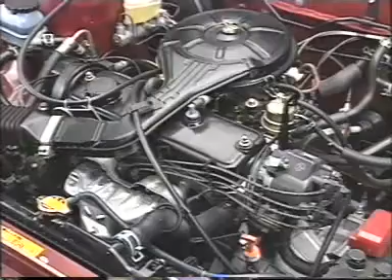Three conditions must be met for a gasoline internal combustion engine to run at maximum efficiency: a good air-fuel mixture, a high level of compression, and an ignition system with optimal timing and powerful sparks. Optimal ignition timing and powerful sparks are the responsibility of the ignition system.

There are various types of ignition systems. In this video, we will mainly use a fully transistorized ignition system to explain the functioning of the ignition system.

In this video, we will look at: first, the structure of the ignition system; second, how a high voltage is generated; third, control of ignition timing; fourth, spark plugs, which use the high voltage to emit sparks, igniting the air-fuel mixture; fifth, other ignition systems; and finally, inspection and adjustment of the ignition system.

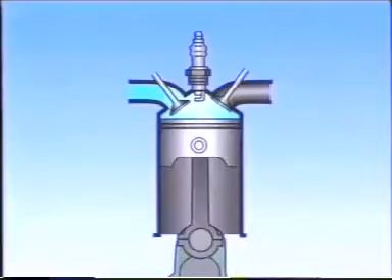In a gasoline engine, spark plugs ignite the compressed air-fuel mixture and generate combustion, providing power. So the ignition system must be able to produce a high voltage in order to provide optimal ignition timing according to the engine's operating conditions.

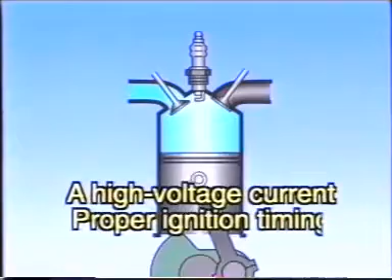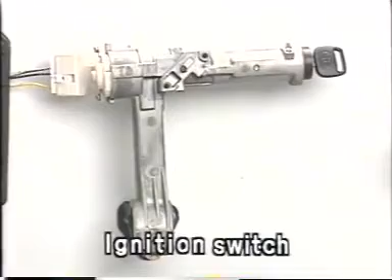First, let's take a look at the components of the ignition system and their function. Electrical power is provided by the 12-volt battery, and the ignition switch. The ignition coil and igniter convert the battery's low voltage into a high voltage.

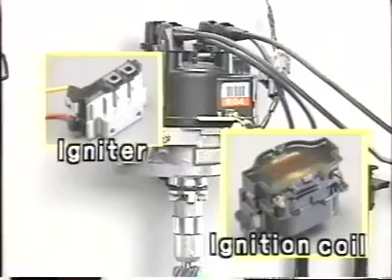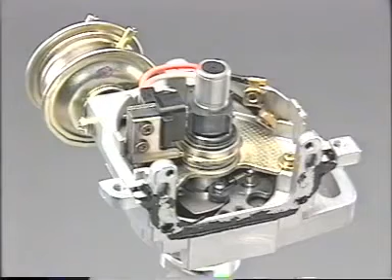This is relayed by the distributor to each cylinder's spark plug. This distributor incorporates an advancer device to obtain optimal ignition timing. A distributor with a built-in ignition coil is called an Integrated Ignition Assembly, IIA.

The charge from the ignition coil creates a spark at the spark plug, igniting the air-fuel mixture. Spark plugs require a high voltage of more than 10,000 volts to generate sparks, but the vehicle's only source of electrical power is a 12-volt battery. So how do we generate a high voltage from a 12-volt power source?

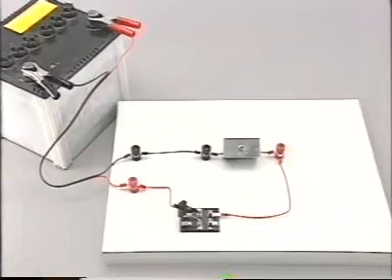Let's explain. Take a look at this experiment. A 100-volt lamp is connected across the battery and the switch is turned on. The voltage is only 12 volts, so the lamp doesn't light.

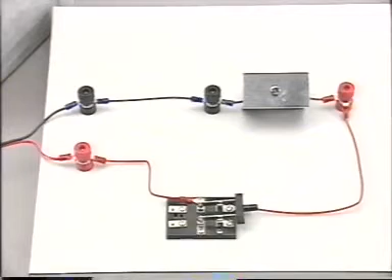Next, a coil is connected across the lamp and the circuit switched on once more. Once again, the lamp fails to light. But at the instant the switch is turned off, the lamp flashes.

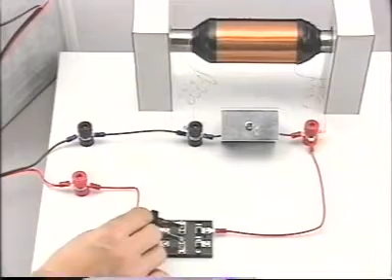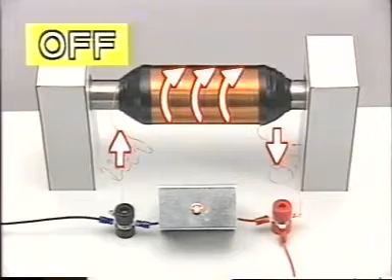Here's why: if the switch is turned off when current is still flowing in the coil, a large electromotive force, EMF, or voltage, is generated, flowing in the opposite direction. This is called the self-induction effect, and the electromotive force generated is called the counter-electromotive force.

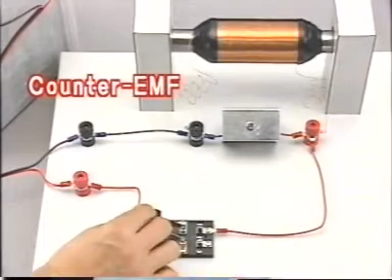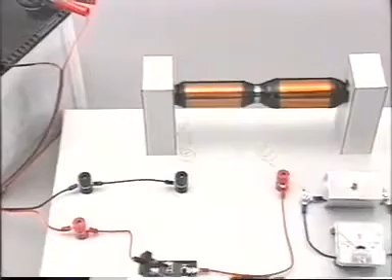Next, let's do another experiment. Two coils with different thicknesses of wire and numbers of windings are connected in series. The moment the switch is turned off, the flow of current in the primary coil is cut, generating a greater voltage in the secondary coil.

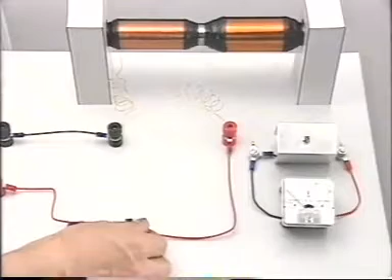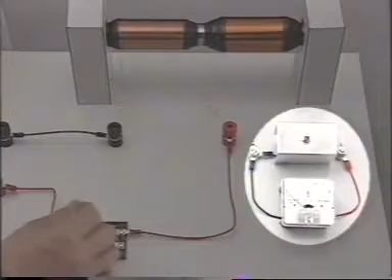When current is switched on and off in the primary coil, a high voltage is generated in the secondary coil. This is called the mutual induction effect. An ignition coil integrates these two coils into one.

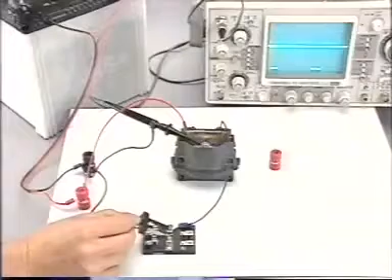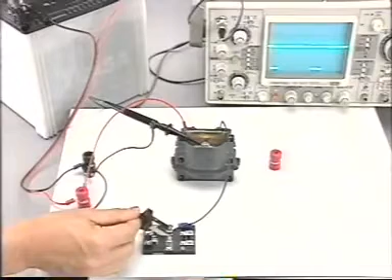Let's conduct a test with an actual ignition coil. The current flowing in the primary coil is turned on and off. As you can see, the ignition coil uses the self-induction and mutual induction effects to generate a high electromotive force of tens of thousands of volts from the 12-volt power source.

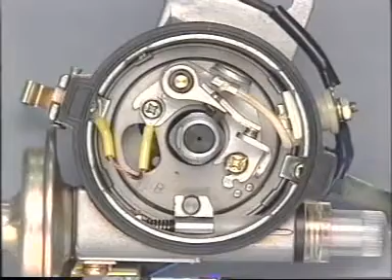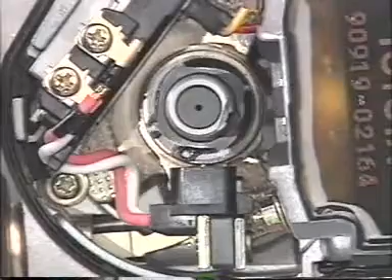Conventional systems use contact breaker points in the distributor to turn the switch on and off mechanically, just like this device. But today, most systems make use of the switching effect of a transistor or an electronic control unit, or ECU.

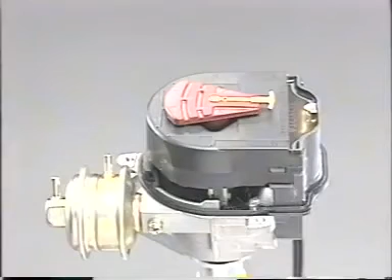Now let's take a close look at how a high voltage is generated using an actual transistorized ignition system. An ignition coil, a signal generator, and an igniter are integrated with the distributor.

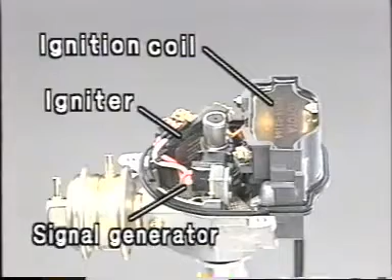In the transistorized ignition system, the ignition signal from the signal generator is transmitted to the transistor in the igniter. This transistor turns the primary current in the ignition coil on and off.

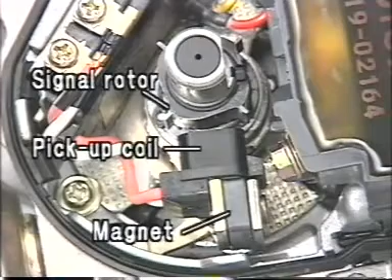The signal generator has three components: a signal rotor, which makes one turn for two revolutions of the crankshaft, a pickup coil, and a permanent magnet. The rotor turns clockwise or counterclockwise depending on the engine.

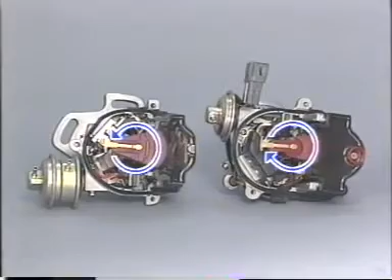As the rotor turns, a voltage is generated in the pickup coil. This is the ignition signal. But why is a voltage generated?

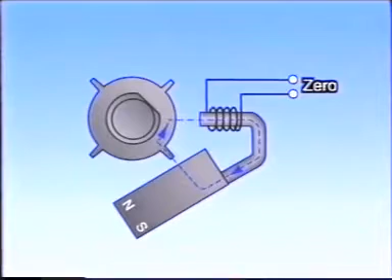The magnetic flux of the permanent magnet flows through the signal rotor, the pickup coil, the bracket, and returns to the magnet. When the rotor is still, there is no change in the magnetic flux. When the signal rotor rotates and a rotor tooth approaches the pickup coil, the magnetic flux density increases. As the rotor tooth moves away from the pickup coil, it decreases.

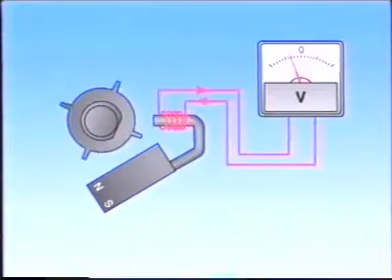This means that the voltage generated in the pickup coil depends on the changes in the magnetic flux. The level of EMF generated depends on the relative positions of the rotor and pickup coil. When a rotor tooth approaches the pickup coil, the EMF increases, and when the rotor tooth and the pickup coil face each other, it becomes zero. When they move apart, a counter EMF is generated.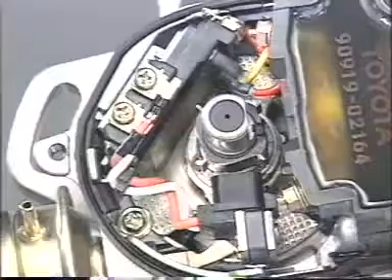These changes in the EMF cause the igniter to switch the primary current on and off. Let's take a look at how the current is turned on and off.

When the signal rotor's tooth is aligned with the pickup coil, the voltage generated in the pickup coil decreases and the transistor is turned off. This cuts off the primary current and generates a high voltage in the secondary coil. The transistor is also turned off when the voltage is generated in the opposite direction in the pickup coil.

In this way, when the engine is running, the transistor is turned on and off every time one of the signal rotor's teeth passes the pickup coil. Every time the transistor is turned off, a high voltage is generated in the secondary coil. The voltage generated in the secondary coil then passes from the distributor's center electrode through the rotor and from the outer electrode to the spark plugs, according to the firing order of each cylinder.

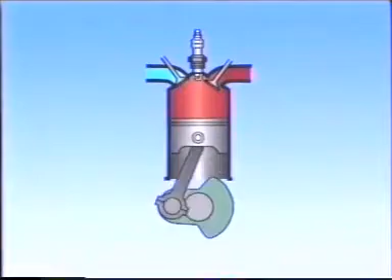Next, let's take a look at the method used to obtain optimal ignition timing. In general, a gasoline engine achieves maximum efficiency if the combustion pressure in the cylinder reaches maximum when the crank angle is about 10 degrees past top dead center. This means that ignition should be timed accordingly.

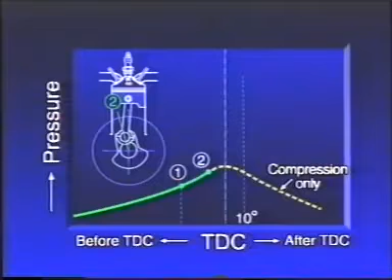This graph shows the process in terms of the pressure changes inside the cylinder. Even if ignition takes place at point 1, combustion doesn't start immediately. Instead, combustion starts at point 2, and pressure starts to increase. The pressure reaches maximum at point 3, and combustion comes to an end at point 4.

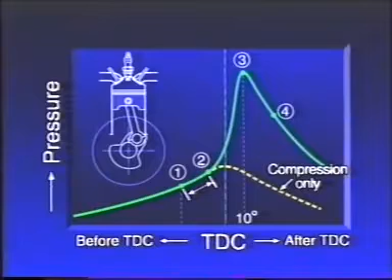The period between 1 and 2 is called the ignition delay time. For a given fuel, this delay is more or less fixed, irrespective of the engine speed. So let's think about what happens if the engine speed increases.

Because the ignition delay time between 1 and 2 is constant, the angle through which the crank rotates in the same period of time increases. The point at which maximum pressure is reached lags behind 10 degrees. So in this case, it is necessary to advance the ignition timing.

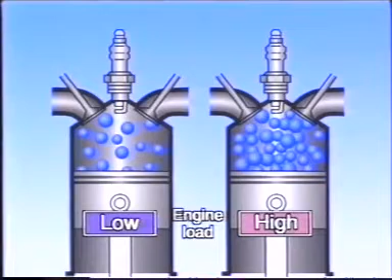If the load on the engine increases, the volume of the air-fuel mixture and the compression pressure inside the cylinder increase. The temperature of the air-fuel mixture goes up, and so the mixture burns faster. As a result, the combustion time gets shorter.

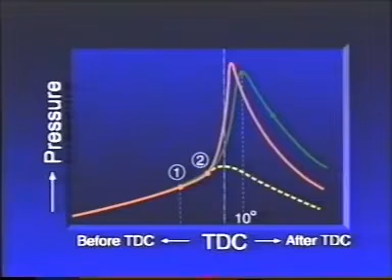This graph shows what happens. In this case, the ignition timing has to be retarded. It is changed according to the engine speed and driving conditions. This is achieved by altering the ignition advance angle, which is controlled by the advancer incorporated in the distributor.

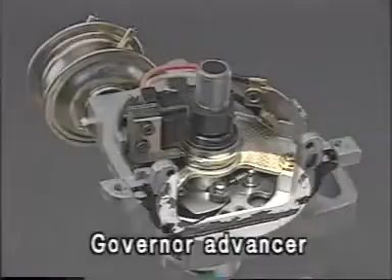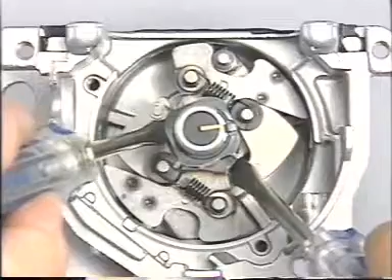Ignition timing is controlled by a governor advancer according to the engine speed, and by a vacuum advancer according to the load on the engine. The governor advancer controls the ignition advance angle by rotating the signal rotor slightly relative to the distributor shaft. And the vacuum advancer controls the advance angle by changing the position of the pickup coil.

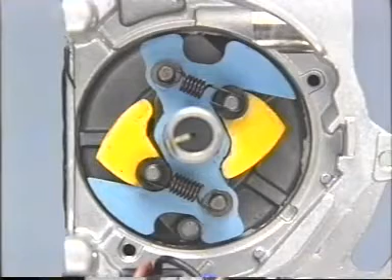Let's take a closer look. The governor advancer consists of a cam plate, flyweights, and governor springs. The cam plate rotates together with the distributor shaft. Two flyweights rotate on the cam plate with support pins as their centers.

At low engine speeds, the flyweights are kept closed by the force of the springs. As the engine speed increases, the flyweights are gradually thrown outward by centrifugal force. Then the cam plate moves the signal rotor in the direction of rotation until the centrifugal force balances the cam spring force. This operation controls the advance angle.

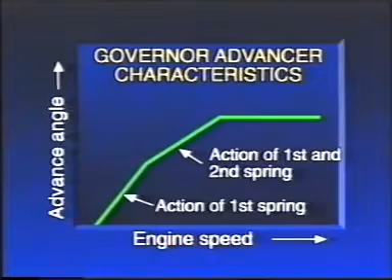This graph shows the relationship between the degree of the advance angle and the engine speed.

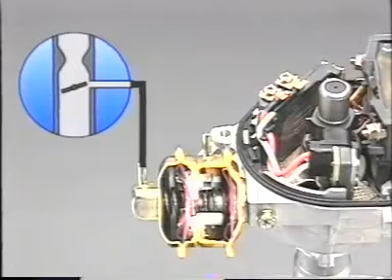Next, let's take a look at a vacuum advancer. Here, a diaphragm is connected to the pickup coil with an advancer rod. This diaphragm responds to the vacuum in the intake manifold. When the load on the engine is light, the throttle valve opening is also small, so a vacuum is generated at the diaphragm.

Pulling the advancer rod, moving the pickup coil to the left, and advancing ignition timing. When the engine load is heavy, the accelerator pedal is depressed, the throttle valve opens wide, and the vacuum in the intake manifold decreases.

Then the spring pulls the diaphragm to the right. As a result, depending on the engine load, the pickup coil moves in the same direction as the signal rotor's rotation, retarding ignition timing.

In automobiles, various types of vacuum advancers are used according to engine specifications. This graph shows the relationship between the intake manifold vacuum and the advance angle.

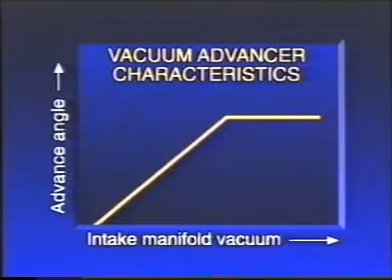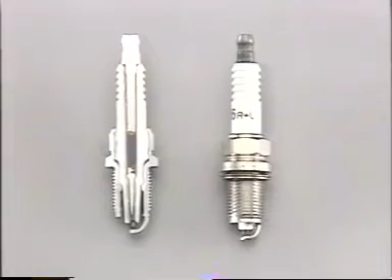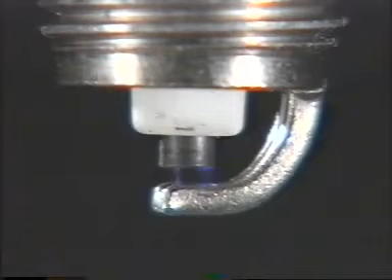The role of the spark plug is to reliably generate strong sparks and thus ignite the air-fuel mixture. The ignition sparks jump between the spark plug's center and earth electrodes. The spark voltage is high or low in proportion to the spark plug gap.

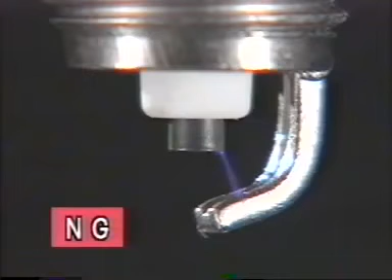Through normal use, the gap will increase, causing the engine to misfire during acceleration. Therefore, the spark plug should be inspected periodically to maintain optimal spark gap.

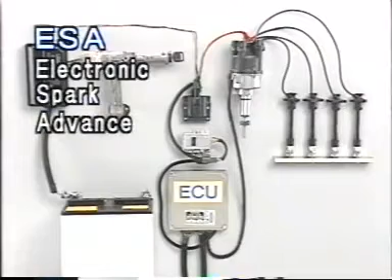Let's take a look at electronic spark advance, ESA. Instead of a mechanical advancer, an ECU, or electronic control unit, controls ignition timing in this system.

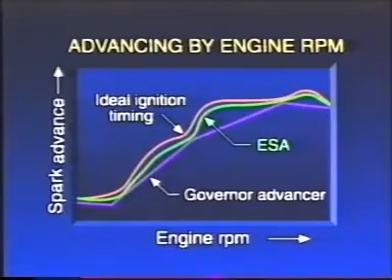This system senses engine conditions based on signals from various sensors. The ECU determines ignition timing and turns the primary current on and off. Conventional mechanical advancers could only control ignition timing in direct proportion to engine speed and manifold vacuum, but using sensors and the ECU, ESA can achieve control closer to the ideal for the engine's running conditions.

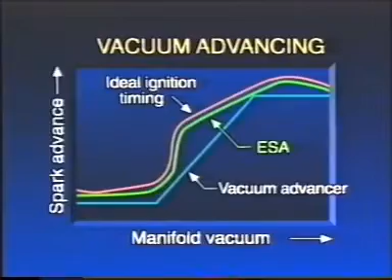In ESA, the distributor has two integrated pickup coils, one of which generates an engine speed or NE signal, and the other a crank angle reference position, or G signal. While the engine is running, these signals are continually transmitted to the ECU.

In case of the D-type EFI engine, other sensors are provided for the ECU, such as the vacuum sensor, throttle position sensor, knock sensor, water temperature sensor, and vehicle speed sensor.

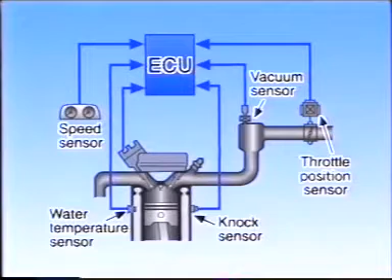Next, let's take a look at a direct ignition system, or DIS. Conventional ESA generated a high voltage with one ignition coil and sent the voltage to each spark plug with the distributor.

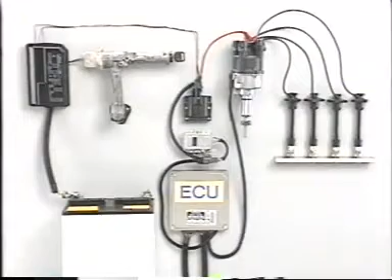But a DIS transmits ignition signals to multiple ignition coils and distributes the power from the ignition coil directly to the spark plugs.

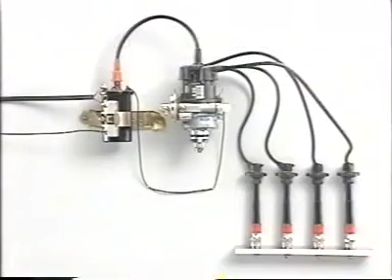Let's have a look at a standard ignition system. Unlike a transistorized ignition system, a standard ignition system turns the primary current of the ignition coil on and off mechanically using the distributor's breaker points.

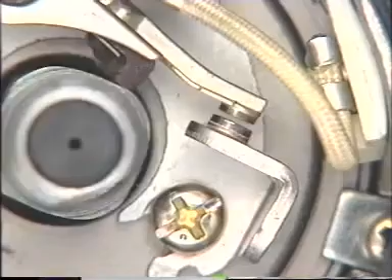The rotation of the cam on the distributor shaft opens and closes the breaker points. This turns the primary current of the ignition coil on and off.

Now let's take a brief look at inspection and adjustment methods for the IIA ignition system.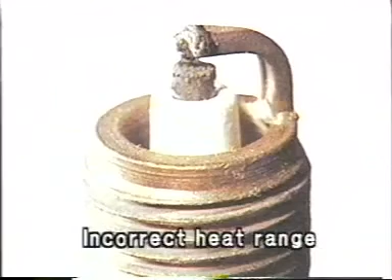If the electrodes are white, the air-fuel mixture may be too lean, or the electrode heat range may be too low, causing the electrodes to scorch. Please clean the electrodes with a spark plug cleaner or a wire brush.

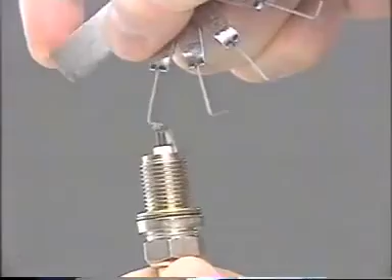Next, check with the spark plug gap gauge whether the spark gap is within the correct range. If the gap is out, bend the outer electrode to adjust the gap.

In the case of a platinum tip spark plug, the tip of the center electrode and the opposing earth electrode are thinly plated with platinum.

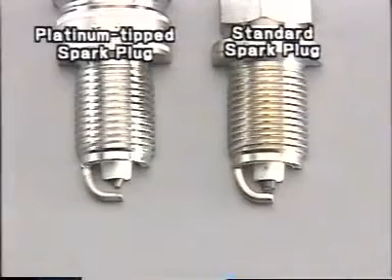In principle, in order to protect the electrodes, they should not be cleaned. But if it becomes necessary to use a spark plug cleaner, for example because of soot, clean the electrodes as quickly as possible. It is not necessary to adjust the gap of a platinum spark plug.

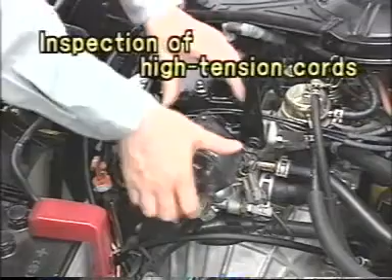Inspection of the high-tension cords. Measure the resistance of the high-tension cords with an ohm meter.

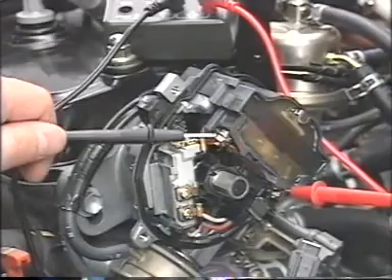Inspection of the ignition coil. Measure the resistance of the primary and secondary coils and check that the resistance is correct.

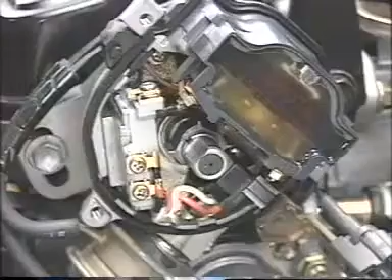Next, measure the resistance of the pickup coil. To inspect the air gap with a non-magnetic feeler gauge, measure the gap between the signal rotor and the pickup coil projection.

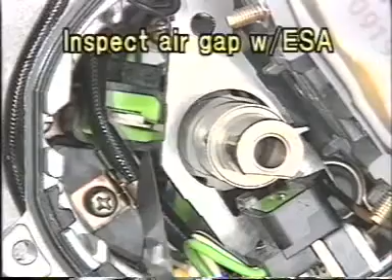In the case of ESA, measure the gap between the NE signal pickup coil and the G signal pickup coil. Also measure signal generator resistance.

To inspect the vacuum advancer, disconnect the vacuum hose and connect a vacuum pump to the diaphragm. Apply a vacuum and check that the vacuum advancer operates correctly.

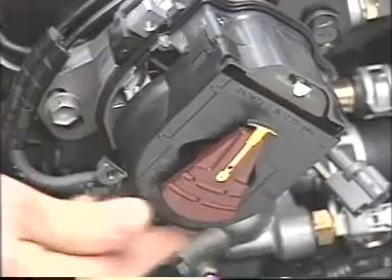When inspecting the governor advancer, turn the rotor forward, release it, and check that the rotor quickly rotates backward. Also check that the rotor doesn't rattle.

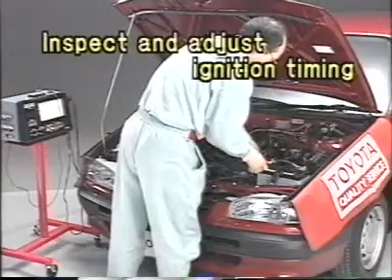Next, inspection of ignition timing. First, connect a tachometer and timing light. Disconnect the vacuum hose from the distributor subdiaphragm and plug the end of the hose. Then set the initial ignition timing.

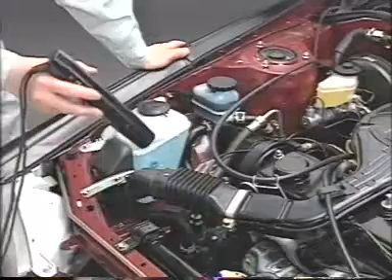With the engine idling as specified, use the timing light to check that the ignition timing is correct. If the engine speed is high at this point, the governor advancer will operate, so be sure to check this with the engine idling.

If the ignition timing is incorrect, loosen the distributor bolts and turn the distributor.

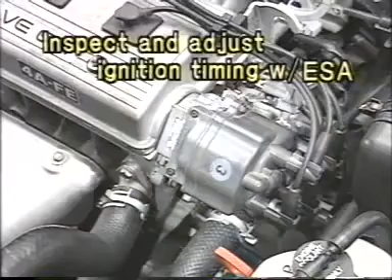ESA has a different inspection procedure. Let's check it out. First, connect the tachometer.

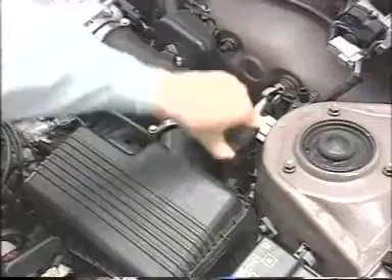Then use the SST to short terminals T or TE1 and E1 of the check connector in order to prevent the correction of the advance angle, and set the initial timing.

With the engine idling as specified, check that the ignition timing is correct. Please refer to the repair manual for the reference value.

This video has explained the principles, construction, and operation of an ignition system. The ignition system is essential for the smooth operation of the engine.

We hope that this video and the other reference materials will improve your understanding of ignition systems and help you in your everyday work.